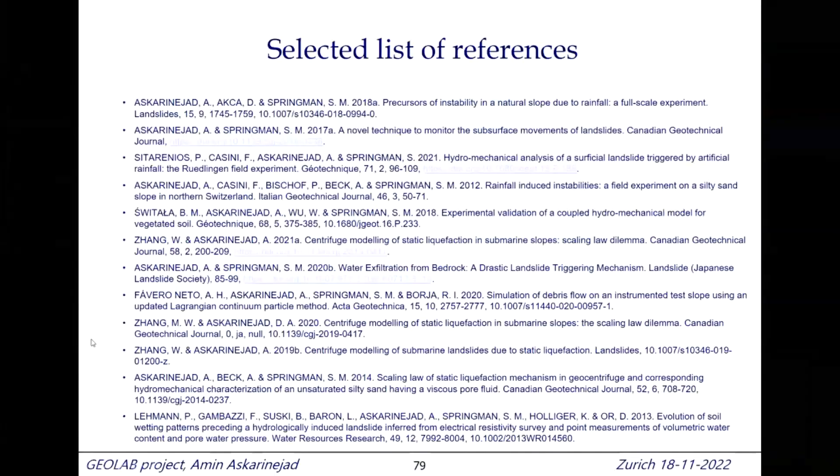Thank you. I mean, I think now the audience knows, to be a good physical modeler, you need to be not only a good geotechnical engineer. You should also be a mechanical engineer, a photographer, and also a farmer, maybe.

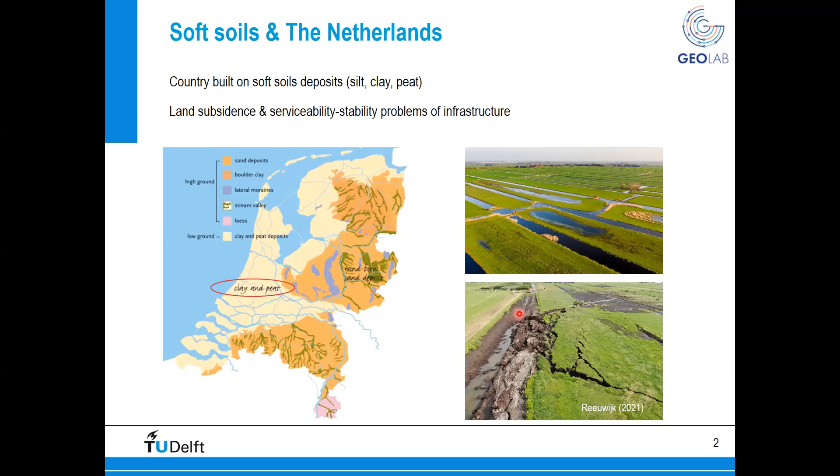One of the most tricky problems in the Netherlands is the behavior of peat. For those of you who might not be familiar with peat, it's an organic soil, composed of partially decomposed organic matter, in particular leaves, roots, and fibers. You can see here multiple levels of fibers in the picture.

Peat is an exceptional material because it has a porosity of 90%, so basically it's almost pure water. It's extremely compressible, so lambda upon isotropic compression is at least 2. But even though it's so compressible, it has a very high friction angle, at least above 40 degrees. And it has multiple levels of fibers, which can range from a few millimeters to a few centimeters long.

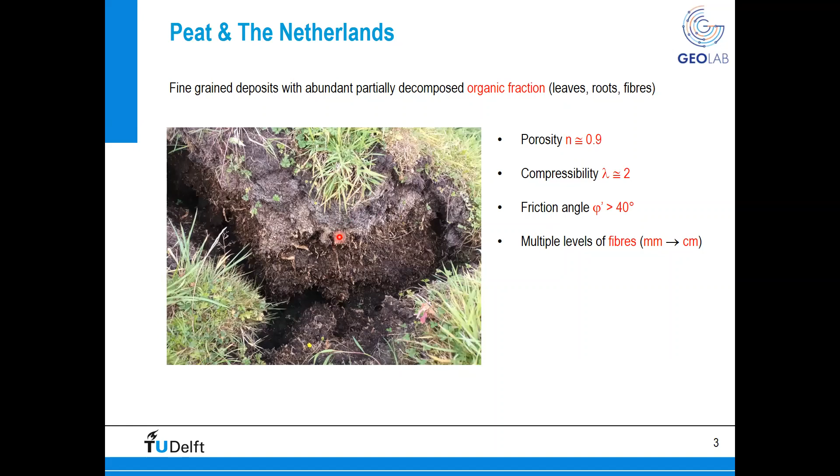One of the most important problems in the Netherlands is understanding how this material behaves at the field scale. How can we understand how peat and its interaction with other soil layers actually occurs in the field? So we started investigating this problem at the field scale in 2015, and there was a unique opportunity.

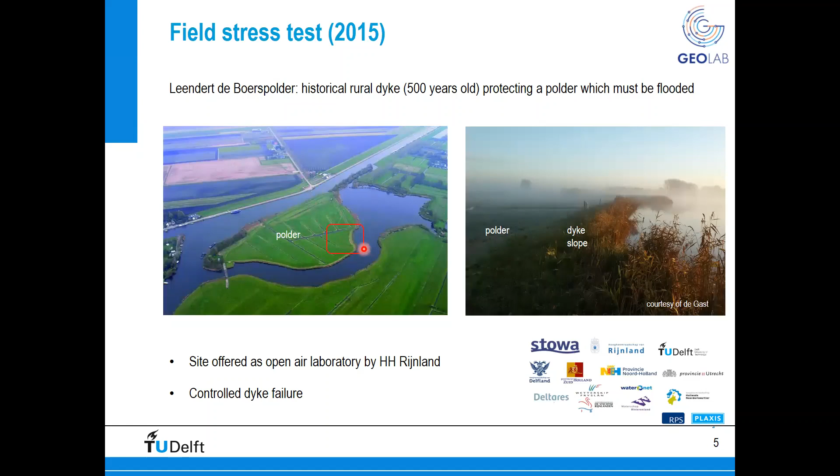There was this polder, a small island in the Netherlands, that was given to TU Delft together with Deltares as a site where we could perform a controlled dyke failure. So we were allowed to inundate the polder and perform a controlled dyke failure. When we started designing it, we started from the field investigation. We focused on this small square you can see on the top right, and we were allowed to bring it to failure.

Here you can see a map of the field investigation that we performed. We performed a series of CPTs, cone penetration tests, in 3 cross sections: south, center, and north. Together with the CPTs, we also retrieved samples from 6 boreholes, located below the crest of the dike, at the toe of the dike, and in the polder site.

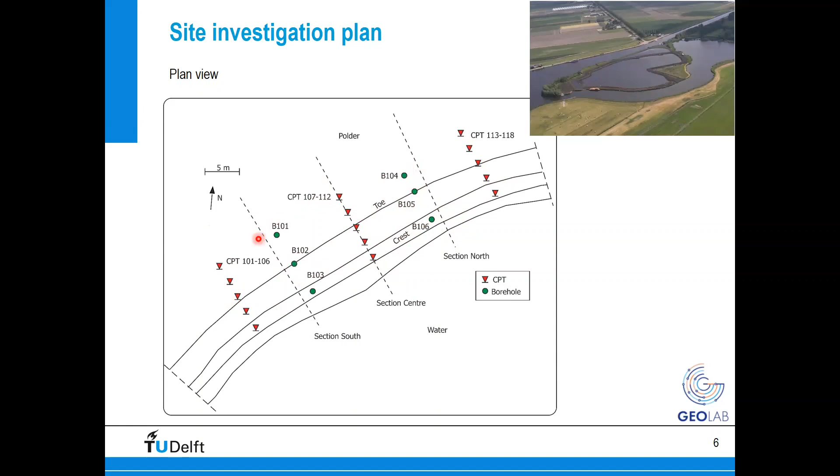Now I want to show you a typical stratigraphy of soft soil in the Netherlands. You see that we have the dike material. You see a lot of scatter in the sleeve friction and in the corrected cone resistance.

And this is because of the fact that the dike material was extremely heterogeneous. There were gravel, sand, and clay, which basically comes from all the material that was available 500 years ago when this dike was actually built.

Underneath the dike material, we have a peat layer, so extremely compressible. You see that the peat layer at the toe of the dike or in the polder is quite thick, 2.5 meters thick. But if you go below the dike material, of course, there was a lot of compression, and the thickness of these peat layers is actually only 1 meter. Below the peat layer, we have a clayey silt layer, also organic. We will see later on what organic means for this type of material. And eventually, deeper, we have a clay layer and a sand layer.

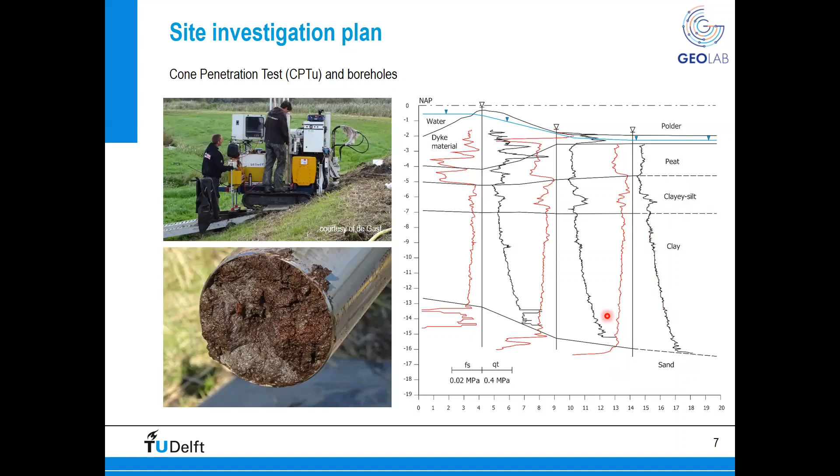Now, after having performed the field investigation, we were able to clarify the layering of our subsoil, and we moved our attention to the laboratory scale to perform a characterization of this material, in terms of index properties, compression behavior, and also shearing behavior.

Now, here are some of the results from the soil characterization. I would like to show you what it means dealing with soft soil in the Netherlands or in other parts of the world. As you can see here, we have the in situ water content. The water content in the dike material is increasing with depth, ranging from 0.2 to 0.6. But when you enter the peat layer, the water content goes to 10. So the peat layer is almost purely water. And at the same time, the clayey silt underneath has a quite high water content of about 1. So please keep in mind this profile of water content, and we will try to compare later on how this profile can also be linked with the profile of the failure surface.

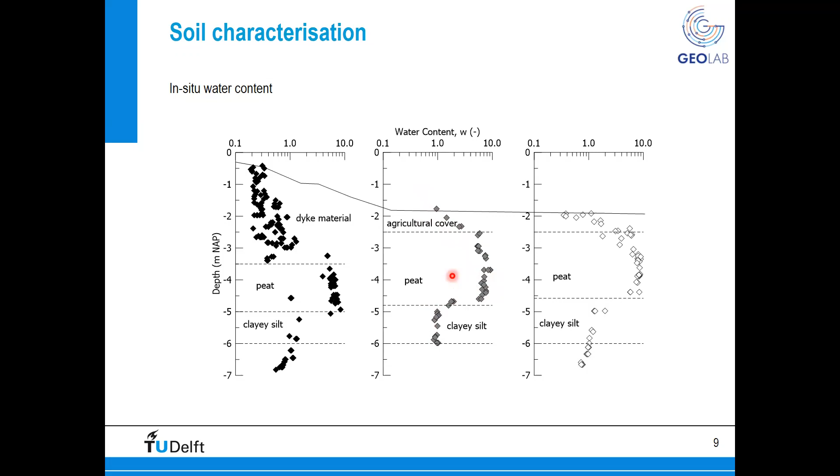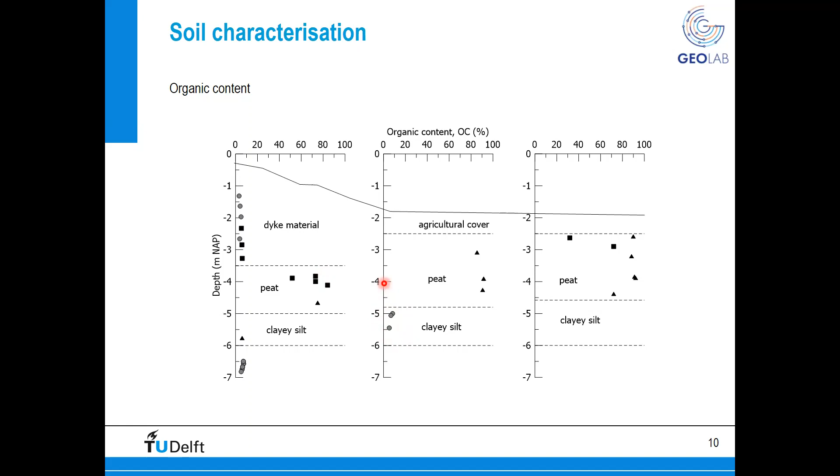Now, together with the water content and organic content, we can estimate the bulk unit weight of our soil. The dike material, due to its heterogeneous nature, has a bulk unit weight ranging between 14 and 20 kilonewtons per cubic meter. The peat materials are quite striking, with a bulk unit weight of basically 10, just above water. And eventually the clayey silt has a bulk unit weight of 14, extremely soft soil.

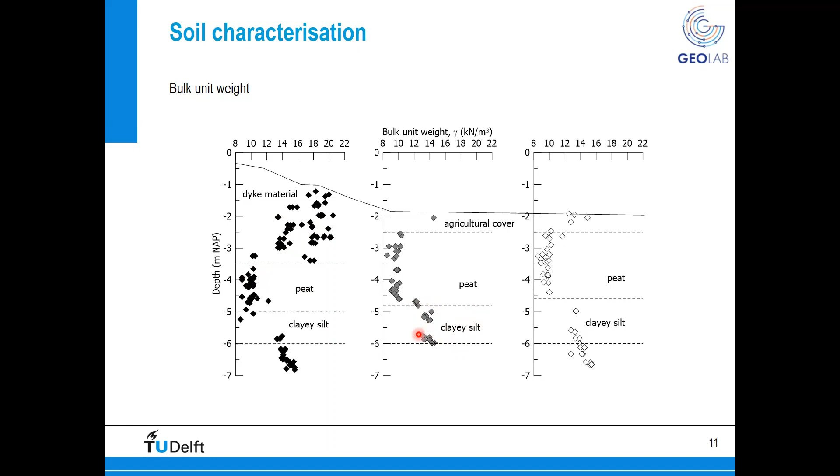Now, if you transfer this low unit weight into effective stress, you understand the challenge of testing such materials from a laboratory point of view. If you want to characterize this soft soil, especially on the polder side, you should be able to perform laboratory tests with a vertical effective stress of about 5 to 10 kPa. So it's extremely challenging experimentally, not only because of the fabric of the soil, like fibers, but also because of the very low effective confining stress these soft soils are exposed to in the field.

Another important feature of characterizing the initial stress state of our soil, which is fundamental to design the failure test, is defining the overconsolidation ratio in the field. Here you see the overconsolidation ratio derived from oedometer tests. The dike material is slightly overconsolidated. The peat layer underneath the dike, due to the higher confining stress, is normally consolidated. But it's quite interesting to see the overconsolidation ratio of the peat and clayey silt at the toe of the dike.

Despite the fact that there was no mechanical loading at this site, there is an overconsolidation ratio of about 3 to 4. And this OCR is not mostly coming from mechanical loading, but from interaction with the atmosphere. So cycles of drying and wetting gave this overconsolidation ratio to this material.

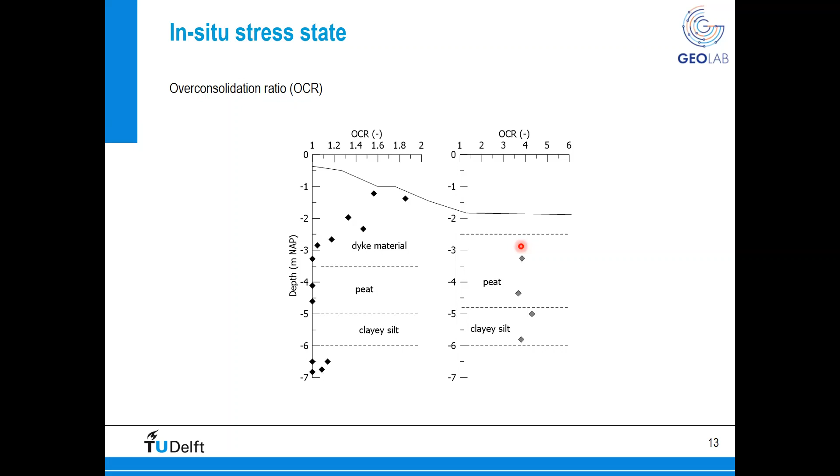Now, I want to show you, due to constraint of time, only some results for what concerns the shearing behavior of this material. And I will show you some of the results from triaxial and direct simple shear tests on these three different layers: the dyke material, the peat layer, and the clayey silt layer, which are the main three layers that were involved inside the failure mechanism.

So the dyke material, as I mentioned multiple times, is extremely heterogeneous. It consists of silt and sand with some gravel inside, OCR between 1 to 2, and a bulk unit weight of 18 kilonewton per cubic meter. You see here an inclusion of silt inside a sample, so you clearly see how heterogeneous this material is. And here you see the results in terms of deviatoric stress versus mean effective stress of triaxial undrained compression tests that we performed at different confining stress.

Now, one of the most important features of this material is it has an initial contractant response, so we have a positive development of excess pore water pressure. But after, especially at large strain, we have dilation. So we have a negative excess pore water pressure. But this dilation is not accompanied by softening, so the deviatoric stress is not decreasing, but it's actually increasing. So this is a specific feature, especially of silty material, tested at very low confining stress.

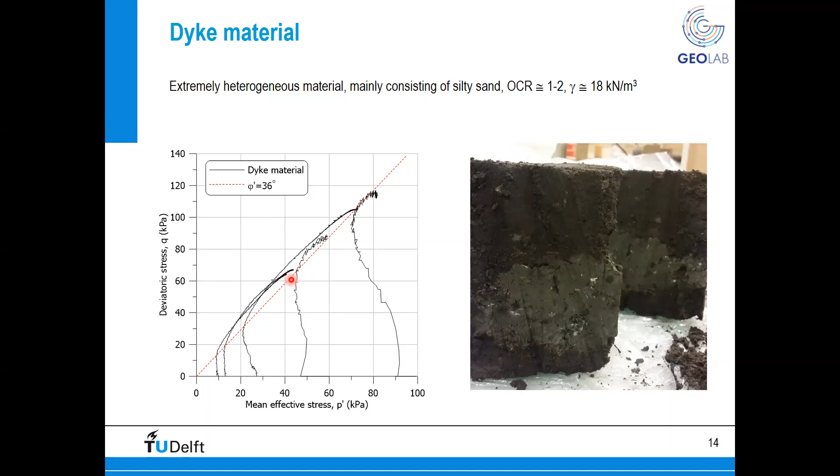And when you increase the confining stress to 40 or 90 kPa, you see that basically we are switching off this tendency to dilate. So basically the dyke material was characterized with a friction angle at critical state of about 36 degrees.

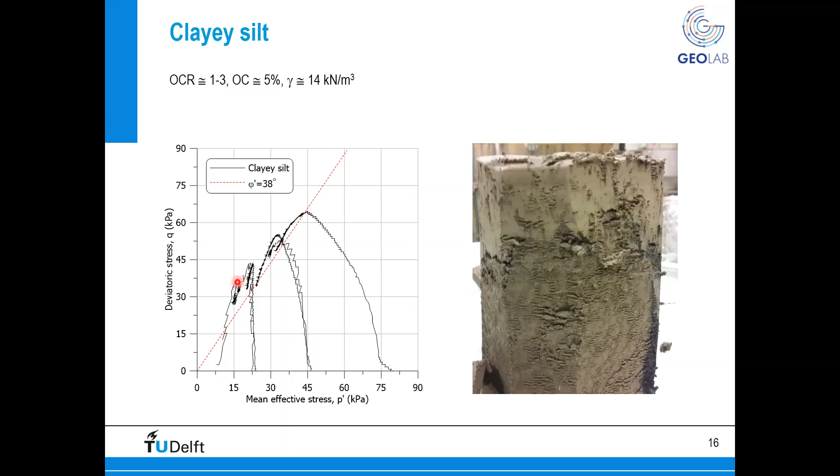And then eventually moving downward towards the clayey silt material, which is the layer underneath the peat. This material has a friction angle of 38. It has a much higher component of clay compared to silt, so you don't see this dilation accompanied by an increase in the deviatoric stress. But you clearly see a more honest, let's say, response. So you have an initial elastic wall, you touch the yield surface, and then basically you have softening towards large strain. So from this perspective, we have somehow characterized the behavior of our material from the laboratory scale. And also we were able to clarify the layering inside our subsoil.

Now, the next step of our field case is designing how we want to bring this dyke to failure. So the water boards, which are the water authorities in the Netherlands, provided us some requirements for this failure. So first of all, we would like to avoid failure of the outer slope of the dyke. So we are interested not in the failure of the outer slope, but we would like to force the failure especially inside the peat layer, because the idea with this stress test is trying to get an understanding from the field point of view of how this material, especially peat, behaves.

And as well, we would like to collect as much information as possible from the pre-failure and failure behavior, because as I mentioned before, we do not have only problems in terms of ultimate limit state, but we also have many problems in the Netherlands in terms of serviceability limit state. And therefore, the knowledge of the pre-failure behavior of this material is extremely important. So in order to satisfy these requirements, we basically designed this type of failure mechanism.

So we decided to excavate the toe of the dyke in order to fictitiously increase or double the height of our dyke. And we performed a series of dewatering at the toe of the dyke in such a way that we were able to gain information from both the pre-failure and the final failure behavior. So we were able to perform a series of drawdowns: the water is down, then we refill it, then we lower it down again, refill it, and lower it down again. In such a way, we were able to collect information throughout different stages of the test.

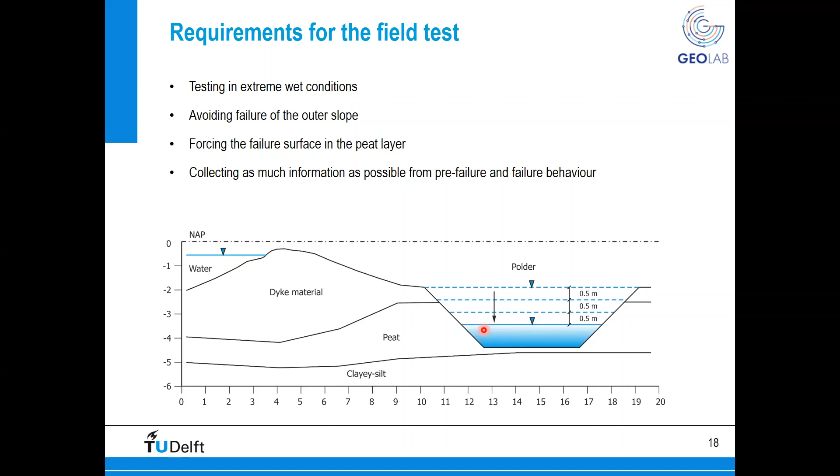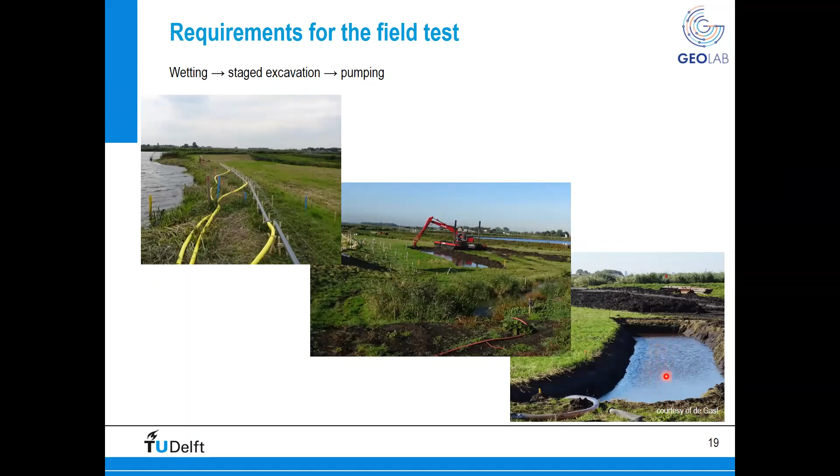Now, in order to collect information, we basically designed this test. You see here the wetting system that we placed at the top of the dike in order to test the material in wet conditions, which are the most critical for the Netherlands. Here you see an impression of the excavation of the toe of the dike. And here you see one of the stages of the dewatering. So we were basically lowering the water table inside the excavated area at the toe of the dike.

But also, and it's quite important, we also installed extensometers. The extensometers were basically anchors that we placed at the interface between the different layers, so between the bottom of the dike and the top of the clayey silt, and so on, in such a way that we were able to reconstruct not only the horizontal displacement, but also the vertical displacement on the different layers. And we will see later on why this information was quite useful for us in understanding the behavior of these soils.

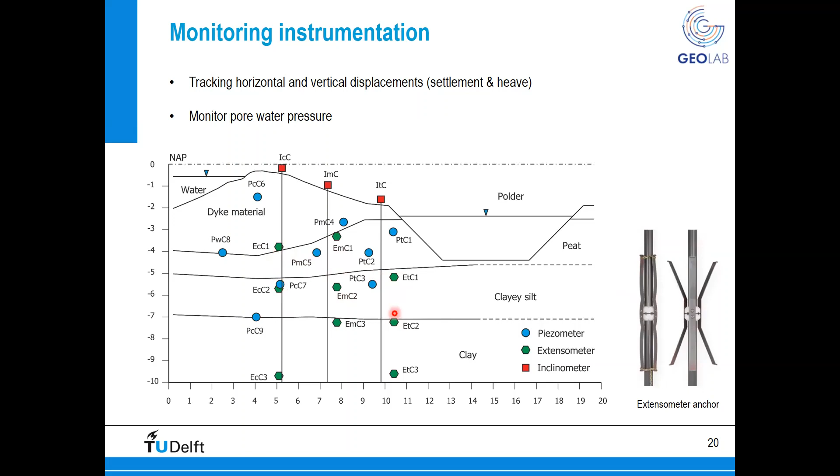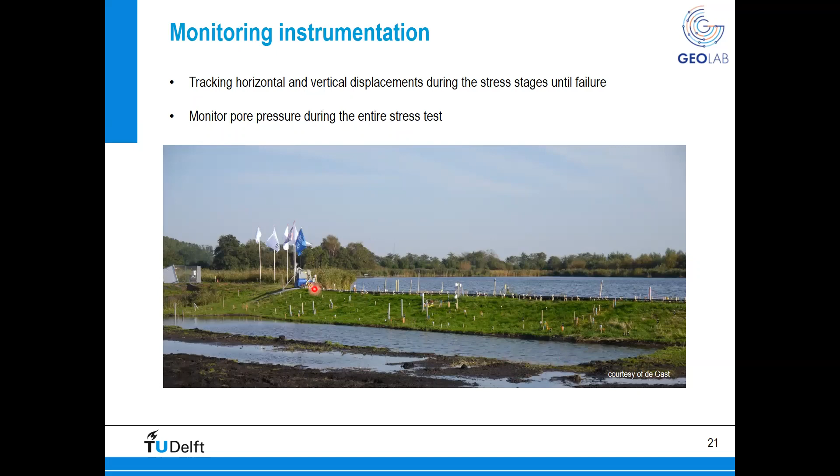This is basically an impression of how the slope looked before the failure. So you see here, we have the water level in the canal. This is the excavated area at the toe of the dike, and here basically is our slope fully instrumented.

We basically were able to bring the sample to failure. So you see here that actually the failure was not extending throughout the entire, let's say, longitudinal section, but was localized between the section south and the section center. And approximately it has an extent of 15 meters. The failure was basically composed by a 3D mechanism. So we have a lateral spreading at the toe of the dike, followed by an inward collapse of the crest of the dike. So you can see here a picture of the failure.

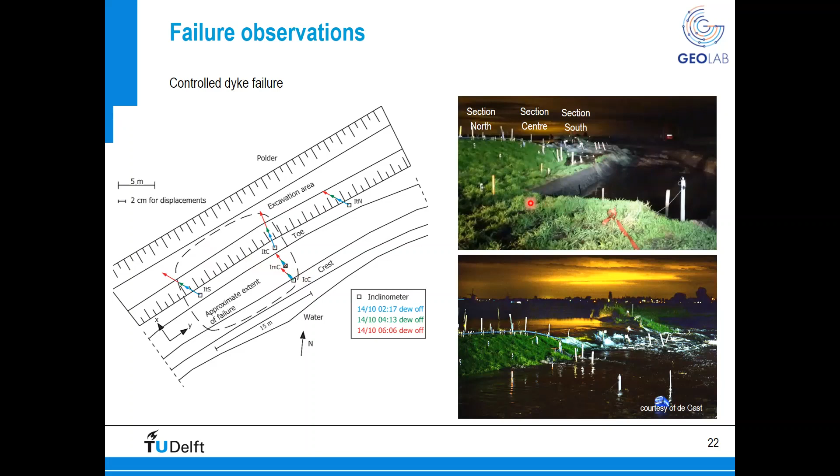The failure was happening very early in the morning, like 6 in the morning, so the pictures were not, let's say, very easy. And here basically is a short video. I hope that you can see the video. It's very short. This is basically the moment of the failure. I try the video. Let's see if it works. Hope the video is working. So you see basically only part of the section collapsed.

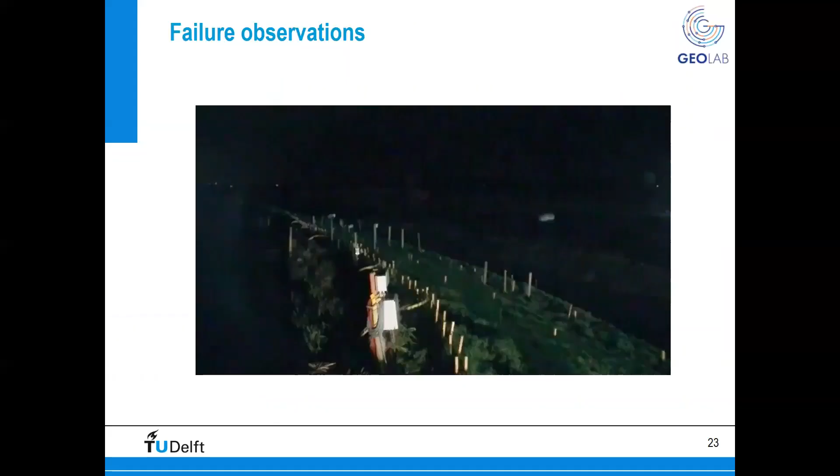If you remember before, I was trying to suggest that you keep in mind what was the profile of the water content in situ. So you can clearly see that the profile of the water content somehow provides an indication of the failure surface. You see here that we reconstructed the shear strain at the incipience of failure. And by looking at the lateral displacement inside the clayey silt layer, we were able to estimate that just before failure, the shear strain was actually about 5%. So 5% was basically the shear strain inside the clayey silt layer that brought the sample to failure.

Now, why did I mention that having information both on the lateral displacement but also on the vertical displacement was important for us? As you remember, we were trying to test with this field stress test how different materials deform and behave in the field. So by combining the information from the inclinometers and the extensometers, we were able to define small blocks of material. So block B1, which is a block of peat, another block of peat below the crest of the dike, and one big block of clay.

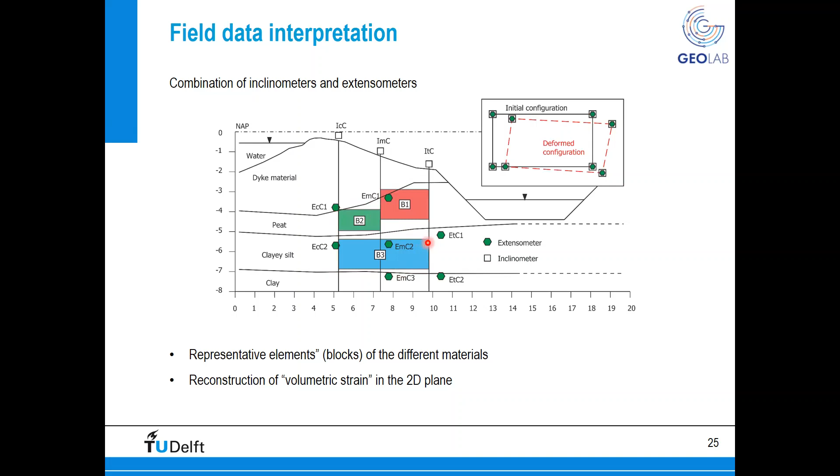And by combining the horizontal displacement and the vertical displacement, we could reconstruct what we call volumetric strain in a 2D plane strain approach. And this is extremely important because this gave us the information to try to understand how these blocks of samples actually deform in the field.

So here I want to show you on the left-hand side the block of peat. You can clearly see that the failure mechanism is described by a very important lateral bulging. You see that the dashed line is the initial shape of the block of peat. And if you follow the deformation mode, you see that the block of peat bulged horizontally due to the very high compressibility of this layer, followed by a small vertical, let's say, squeeze.

At the same time, the behavior of the clayey silt layer is completely different. So by combining, again, the lateral displacement and the vertical displacement, we could see that the clayey silt layer behaves similar to a direct simple shear test, however, there was a small dilation. So it's a direct simple shear test, not at constant height.

So having an insight on the failure mode of the different layers in the field was extremely important for us, because with this information, we could also assess which type of laboratory test is more representative of the failure mechanism. So for a clayey silt material, we can assume that a simple shear, though not necessarily at constant height, is good enough.

However, if you look at the peat at the toe, a direct simple shear test might not be the most suitable test for peat, because this lateral bulging could be better mimicked by a triaxial compression test, or even better, we are now placing a lot of effort in Delft to try to use a biaxial apparatus to actually impose a plane strain lateral bulging inside peat.

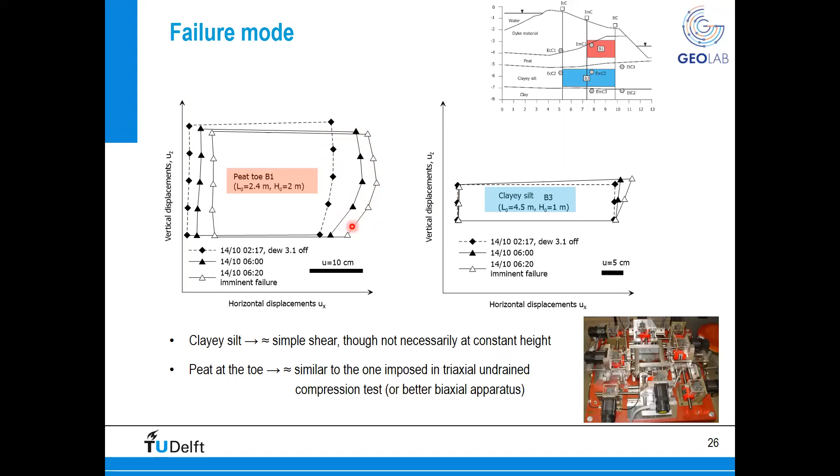And having the knowledge of the failure mode of this material, in my opinion, is extremely important, because peat especially, in my opinion, is a fabric-sensitive material. So we often speak about stress path, but for this material, which contains a lot of fibers, in my opinion, it's more appropriate to speak about strain path.

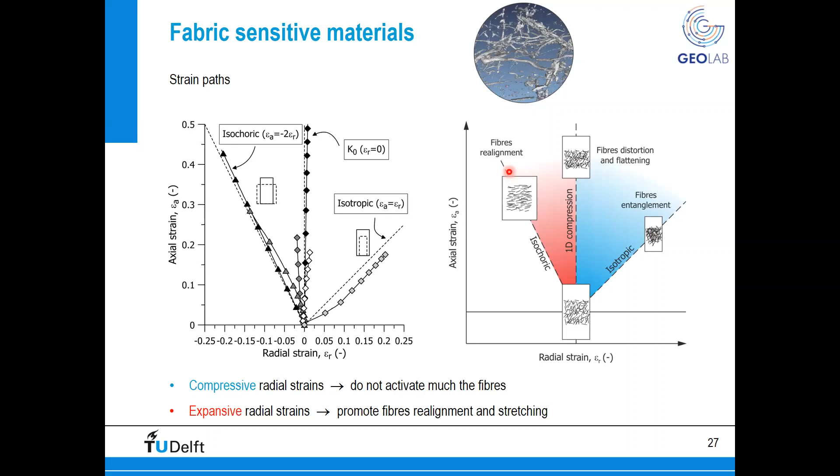So that's why the knowledge of the type of failure in the field is extremely important, because it will guide us on which type of laboratory test we want to place inside our test program. And speaking about fibers, testing peat at the laboratory scale is extremely complex. It's complex because peat is not a simple soil. There is a lot of uncertainty in how we can derive shear strength parameters for peat.

So if you transfer a tension cutoff line into friction angle, you end up with a material with 90 degrees of friction angle, which obviously doesn't make sense in terms of the assessment process. We cannot assume a material with 90 degrees of friction angle when we are performing our stability analysis. So the idea here is just to show you how the behavior of peat could be better captured if we assume that peat is a composite soil.

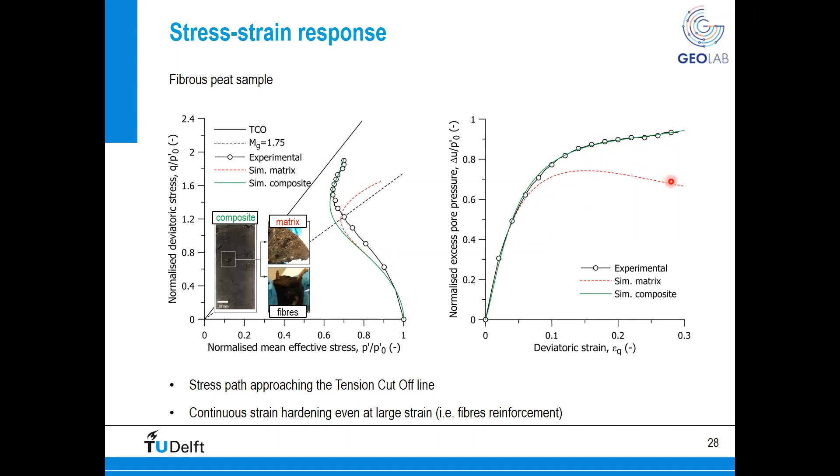So even though the matrix is already at failure, due to the additional confinement of the fibers, the overall impression that you get from laboratory tests is that this material is much stronger. And this is true both in terms of the deviatoric stress response that you can see here on the left-hand side, but also, and more importantly, in terms of pore water pressure. So you have an additional increase in pore water pressure compared to the matrix due to this additional confinement of the fibers.

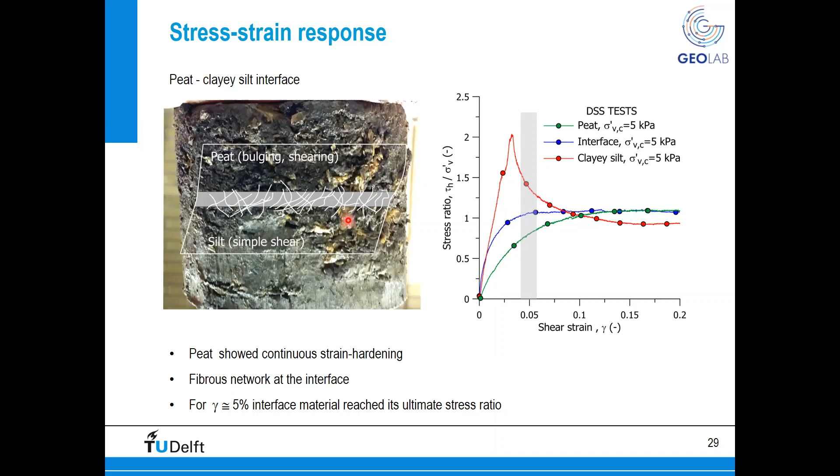So having an insight from the laboratory point of view into the different kinematic compatibility between the different layers is extremely important. And this kinematic compatibility, in our opinion, comes from the role of fibers. So the lateral displacement that you saw inside the peat layer was basically transferred to the clayey silt through this kinematic constraint of the fibers. And the clayey silt layer reached failure much earlier than the peat due to a completely different stress-strain response.

Now, to close the presentation, I would just want to give you a brief insight of what is the current research that we are busy with. So a lot of attention has been dedicated with this field stress test to the actual behavior of this material, especially in fully saturated condition.

But as mentioned by Suzanne this morning, a lot of problems nowadays come from climate stresses. And in particular, for organic soil, I like distinguishing between two broad categories of climate stresses. So we have the classic unsaturated soil shrinkage and swelling due to drying and wetting cycles, with formation, for example, here of desiccation cracks on our dikes and flood defense infrastructure.

But actually for peat and especially highly organic material, there is another problem related to climate stresses, which is the degradation of this material. There is production of gas, which is coming from the biological degradation of this material, promoted also by increasing temperature. And actually peat develops gas. So inside our peat layer, we often see bubbles of methane and carbon dioxide. And here we call it gassy soil. So there are some conceptual differences between unsaturated and gassy soil.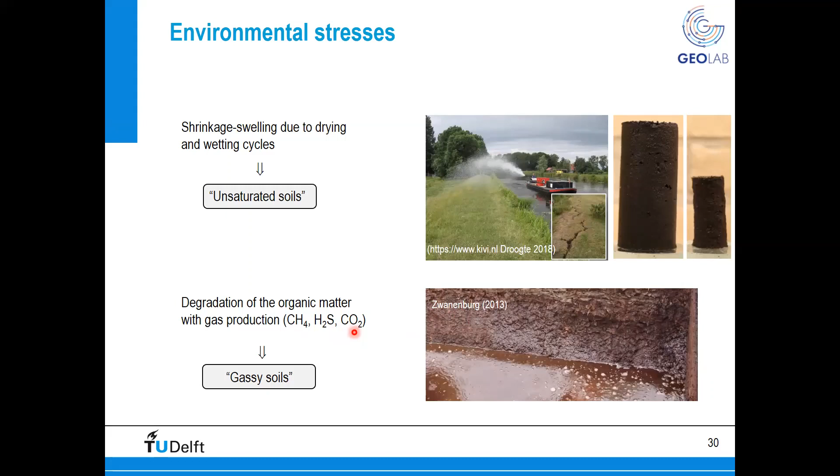I just want to show you one small example of a recent experimental investigation that we have been conducting here. So we try to evaluate what are the implications of having gas bubbles inside our soil. So here we generate artificially some CO2 bubbles inside our peat layer, and we perform triaxial drained compression tests on samples containing a different amount of gas. These tests were containing basically between 5 to 10% of gas in terms of volume.

I want to show you what it means having gas inside our soil. So you see here the mobilized friction angle at two different levels of strain, 2% and 5%. The white dot is basically the friction angle of peat at 2% without any gas, so it's about 20 degrees. And at 5% of axial strain, the friction angle is about 35 degrees. But if you account for the presence of gas, you clearly see a reduction of friction angle. So the presence of gas in peat is actually reducing the mobilized shear strength.

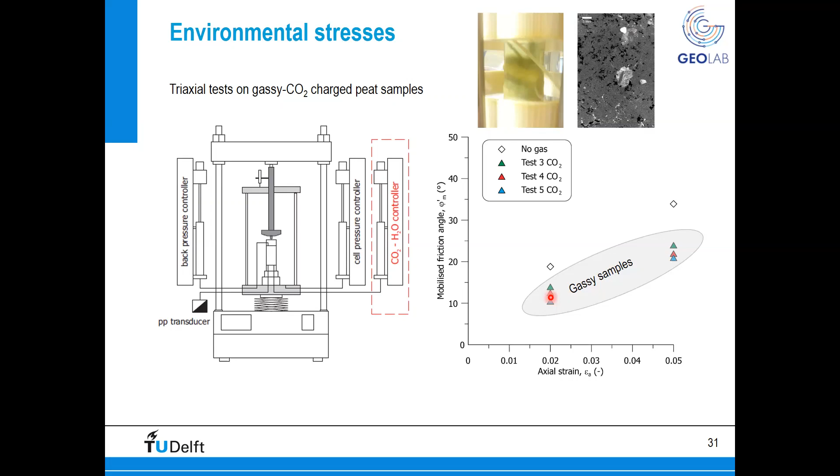And the reason is because part of the strain that you are imposing to your sample is actually used to compress the pore fluid, which now contains gas, and only a minor part will go actually in stretching your material. So accounting for the presence of climate stresses, in particular gas, is a quite new challenge that we are now facing in our environment.

Now, to conclude this presentation, the field test, in our opinion, is a unique opportunity to gain knowledge on the behavior of a geotechnical system as an overall, and in particular on the interaction between the different layers, and especially the kinematic compatibility at the interfaces between layers. But as Amin mentioned before, a combination of multiple sensor technology, inclinometers, extensometers, and pore water pressure can actually give you an insight on the coupled hydromechanical behavior. And at the same time it is a unique source of information for numerical modeling.

But at the same time, a field test must always be accompanied by laboratory tests. And in particular, laboratory tests are fundamental not only for designing the stress test itself, but also to understand and interpret the field monitoring data.

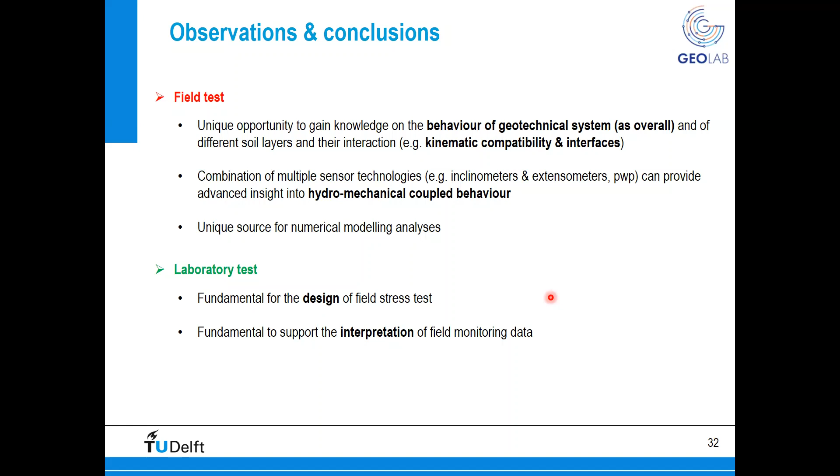Thank you, Stefano. I think both Stefano and Amin's talks gave us a quite good example of how the understanding of the element can contribute to the interpretation and design of the field testing. So now, any questions from the audience?

Yeah, sure. I have a question for both. Very nice presentations, excellent, both of you. Very interesting. Why does the slope always fail? Why does it fail at night? Thank you, Yanis. That's a very nice question. We actually aimed to fail around 8 in the morning, but actually it was earlier, but we were lucky enough that there were people there to take pictures and video. So we need to do better next time.

I think it has something to do with the moon. No, I have no explanation. It is a funny question, of course, obviously, and everybody's laughing. I was laughing myself when I was thinking about it. But does it have to do perhaps with anything like vegetation, the trees? I don't know. Or the statistical, let's say, data of 2 out of 2 is not enough? I think the second. The second. Yes. Okay, thank you.